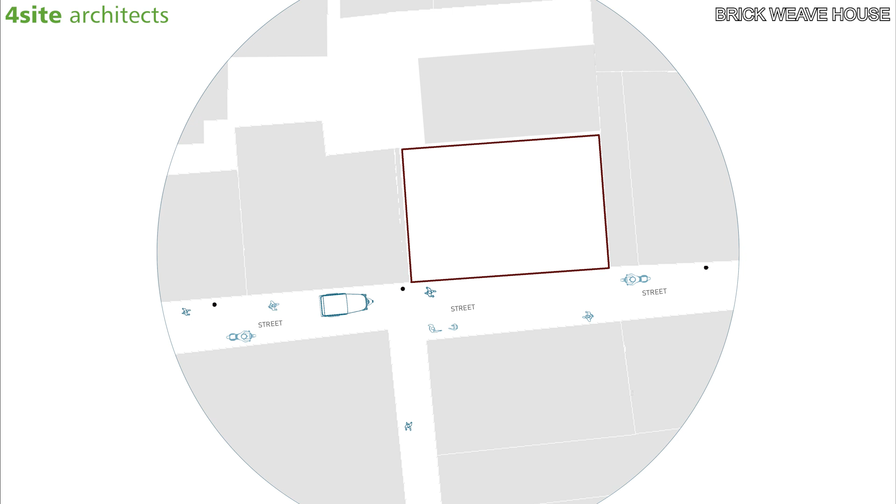Sometime in mid 2019, our client Yashwant approached us for a building on a tiny plot of 24 feet width by 16 feet depth at the heart of Cubbonpet, Bangalore. The requirement was to create a mixed-use typology building with commercial units along the first two stories and a residential duplex over the same footprint.

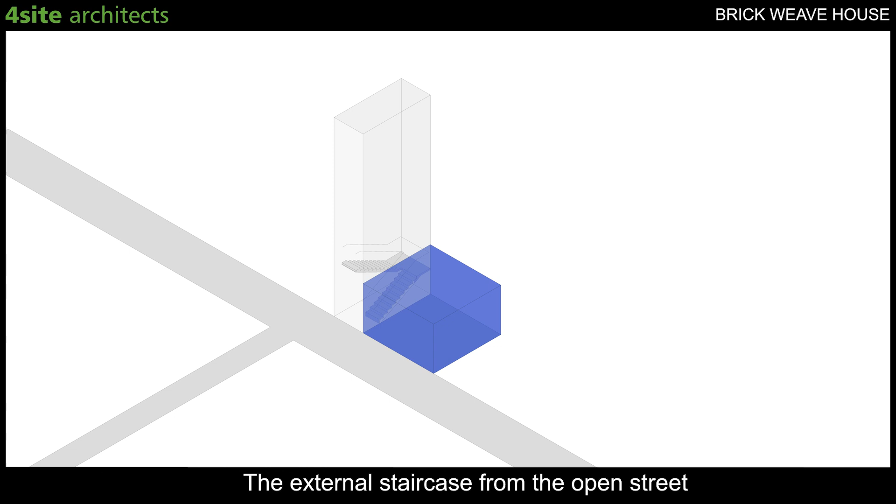The client suggested that a narrow 8 feet wide approach road in this old city centre would not provide any opportunity for parking. We applied the theory of path and domain as a design strategy. The external staircase from the open street connects the commercial unit at the first floor and the home at the second floor, where it converts into an internal staircase for the duplex.

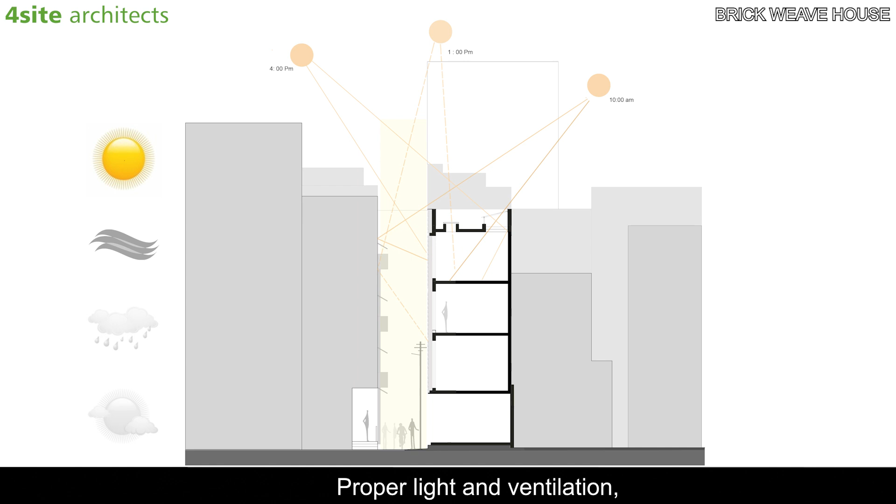As a row house, our landlocked building has a front facade that provides proper light and ventilation, acts as rain and sun shade, reduces solar heat gain, and provides privacy.

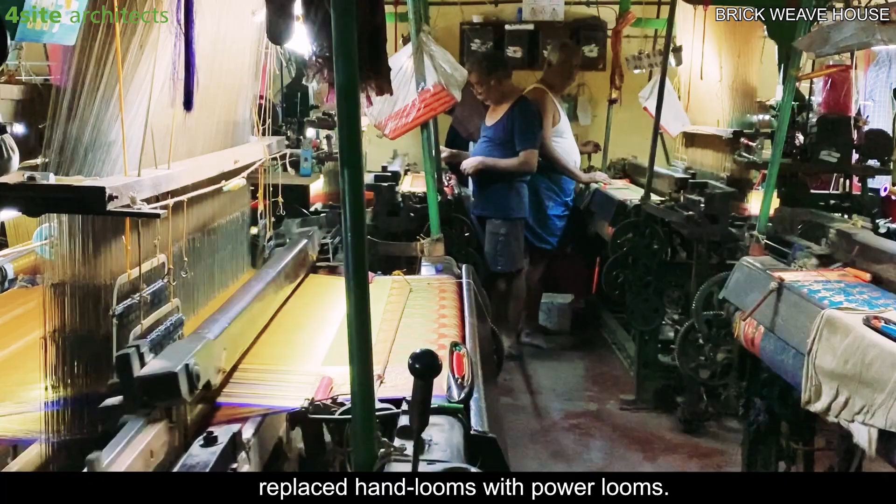The neighborhood was once home to one of India's largest handloom industries. Over time, technological advancements replaced handlooms with power looms. Our client hails from a family of weavers and retains childhood memories of their traditional weaving systems. With an intent of preserving this scale, we identified an opportunity to recreate the facade as a memory of the rich history of the weaving communities of Cubbonpet.

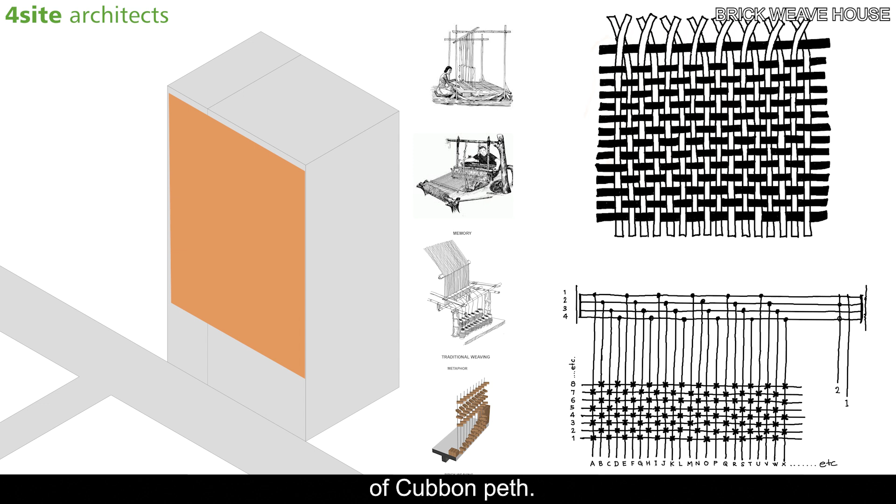Taking cues from traditional methodologies, we started to experiment with bricks, weaving them through metal rods to create a brick woven screen for the facade.

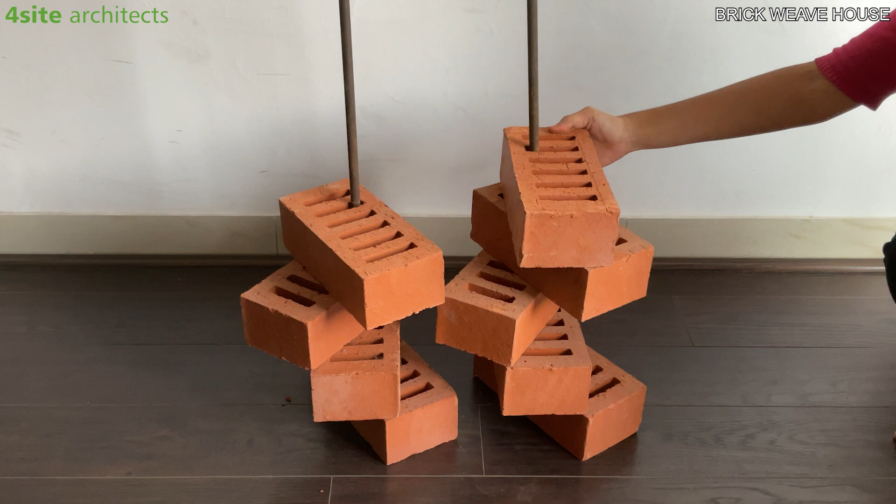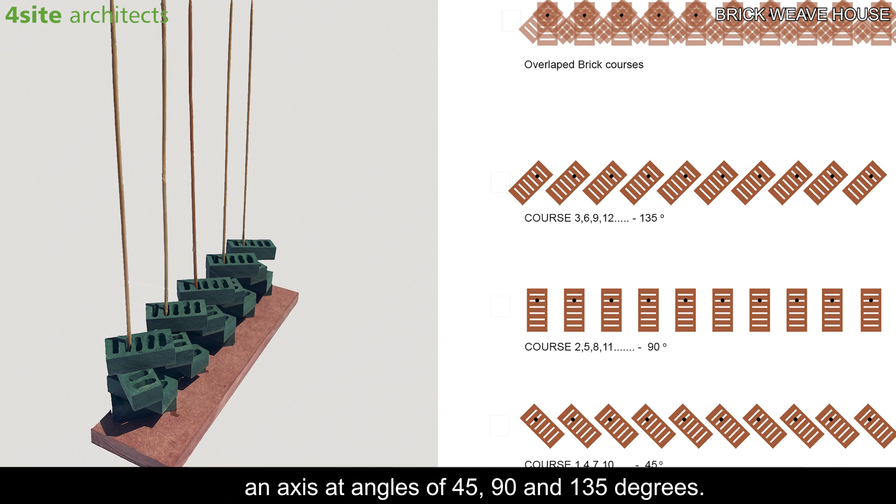After many iterations, we decided the best arrangement would be to weave the bricks in repeating rows of 3 along an axis at angles of 45, 90 and 135 degrees.

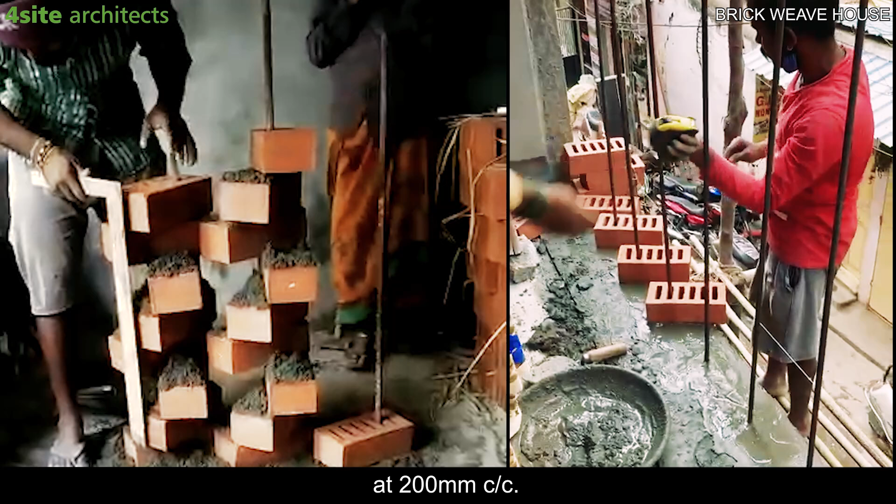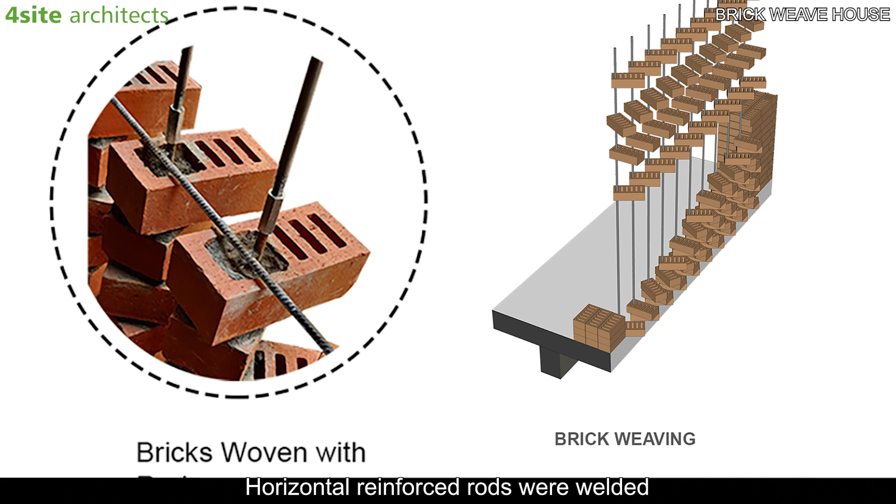The bricks were woven into 10 mm diameter, 4 feet long MS Bright rods placed vertically at 200 mm center to center. The rods were threaded at 4 feet length with 16 mm hexagonal couplings to join the 10 mm rods further vertically. Horizontal reinforced rods were welded at every 5th course of the brick weave screen to fix any lateral movement.